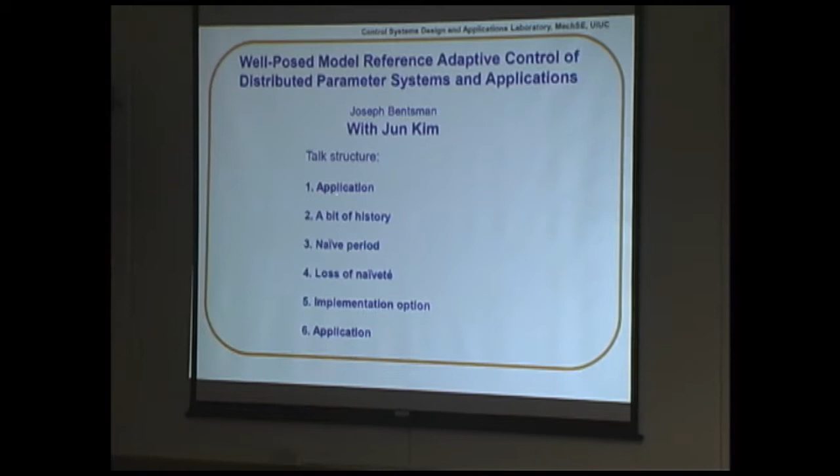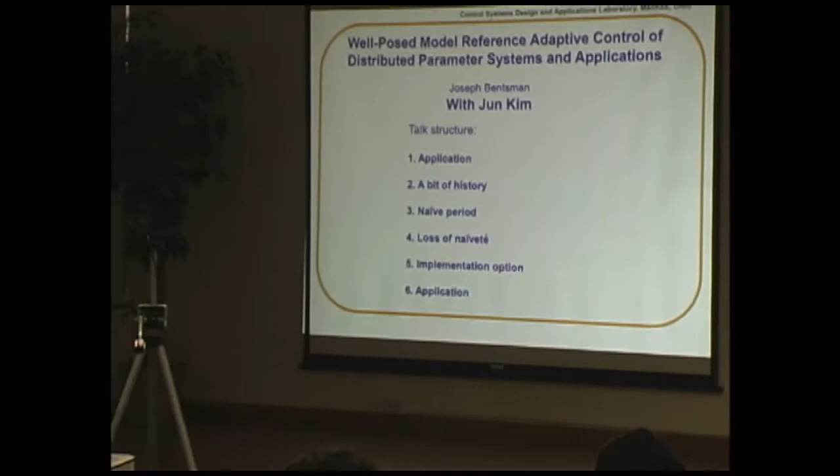This work has a long history, and I will go through the several stages of formation of this area. We had a talk from Professor Krstic a couple of days ago, who is also a carrier of the same tradition. He's a student of Professor Kokotovic, and he started looking at this area after Yuri and I had already developed quite a bit.

So, the applications that we're looking into are numerous. Just two of them that I'm going to present here are the steel casting process and the future transport aircraft that is being developed by NASA right now.

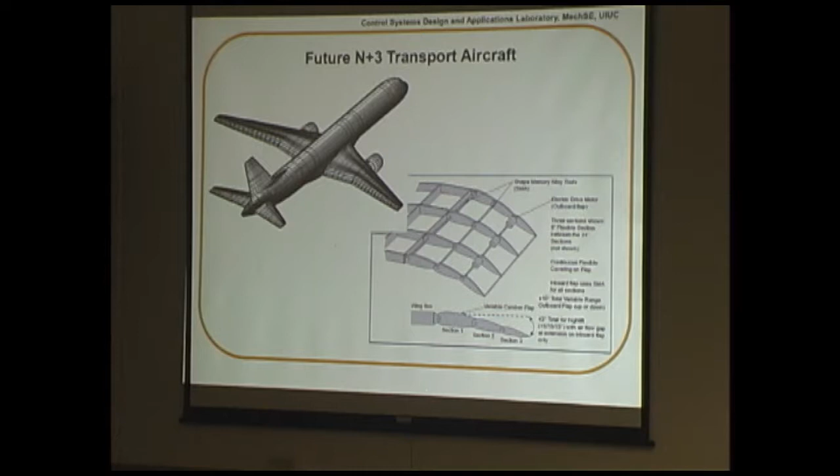In the steel casting process, continuous casting now covers about 95% of the steel produced in the world. When I started working in this area, fresh from a postdoc at the University of Michigan, I immediately began working with Gary Steel.

Gary, Indiana, next door to Champaign-Urbana, about a 2 hour drive, posed the problem of how to control oscillations in the mold, how to control the flow out of these nozzles, and how to control the stirring of the steel through electromagnetic stirrers.

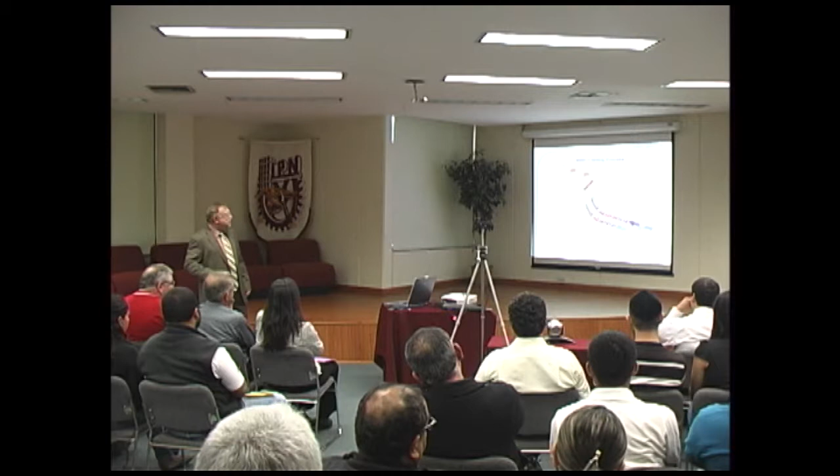But the biggest problem here is how to control solidification. There are two problems with controlling solidification. One is that by the time the steel has to exit the containment zone, where these two rolls are, that marks the end of the containment zone. Otherwise, the steel is contained in the zone.

In blue is completely solidified steel inside the red part, which is called the strand. It's a rectangular section, and this whole thing is called the strand. So this part is fully solidified, and this part is not fully solidified. So what happens very often is that the red area means there's some liquid steel inside there.

Liquid steel all the way from here pushes on this, creating ferrostatic pressure. As a result, this is going to bulge out like a whale and spout — this is called a breakout. That costs about $1 million to fix. It's very dangerous, and it can actually result in human loss of life. This is a phenomenon that has to be contained.

The other problem is that in the bending and unbending areas, a lot of cracks appear. Those cracks are inside, on the interface between the solid and liquid inside the strand — internal cracks. There are also cracks outside, where bending and unbending creates surface cracks.

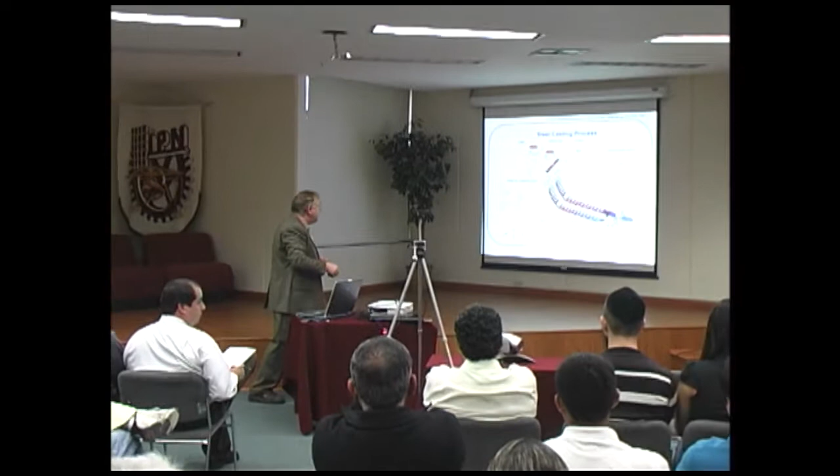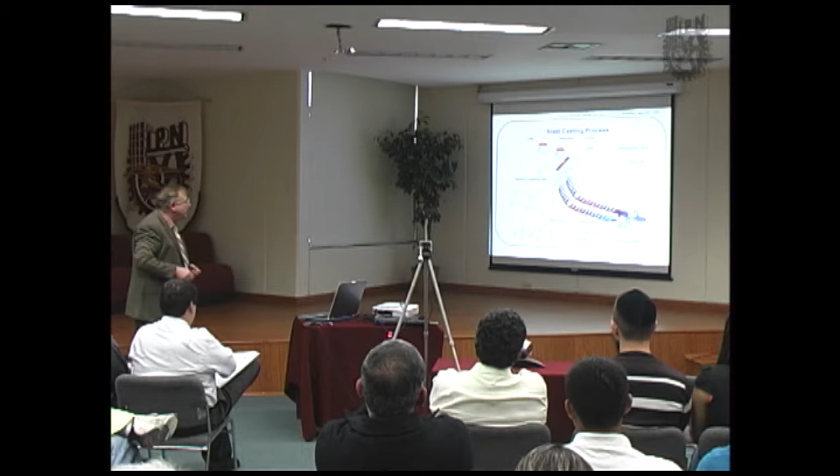So here is the shell: from the inside there's a heat source from the molten steel, and from the outside a heat sink from the sprayed water — the whole thing acts like a rod. If we think of cutting a cross-section here, the whole thing becomes two-dimensional, with liquid inside and solid outside.

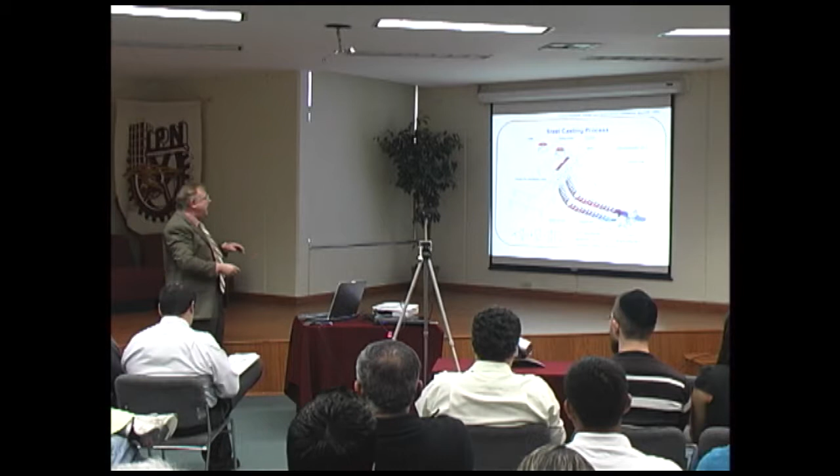When we cut that one along the center line, we get a one-dimensional rod, basically, which flexes. From the inside, this rod is heated up by the molten steel. From the outside, this rod is being cooled by the water.

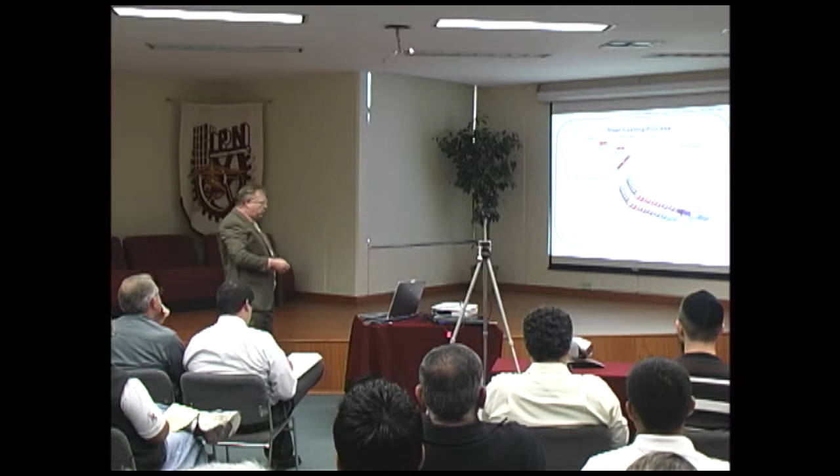So what we have just done is a model reduction from the three-dimensional through this cut to two-dimensional, and that was a boundary control problem because of the sprays. From two-dimensional boundary control, we reduced it to one-dimensional distributed control, where the internal heat is distributed along the length of the rod, and the outer source sink is taking out the heat also in a distributed way by spraying the surface. So what I'm writing here is not boundary control as for the true process, but actually a distributed control, which is just an approximation of this 2D boundary control, actually three-dimensional boundary control, like a one-dimensional distributed control.

Therefore, the equation that I'm going to be considering is the heat equation with distributed control. So this gives rise to a distributed control problem through this view of that cooling problem.

Another point that will come up later in the talk is that the temperature inside the strand is more or less constant. This is the temperature of the steel, of the molten steel inside the strand. Therefore, the heat flux from the internal fluid can be viewed as a constant disturbance. So there will be a rod with constant disturbance.

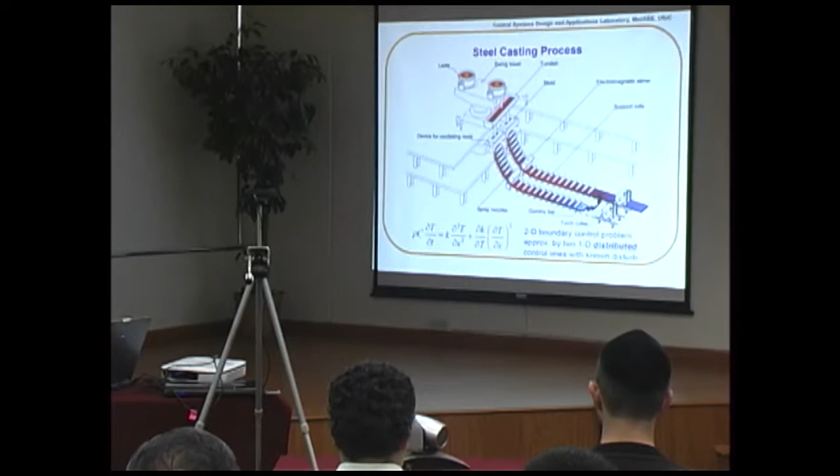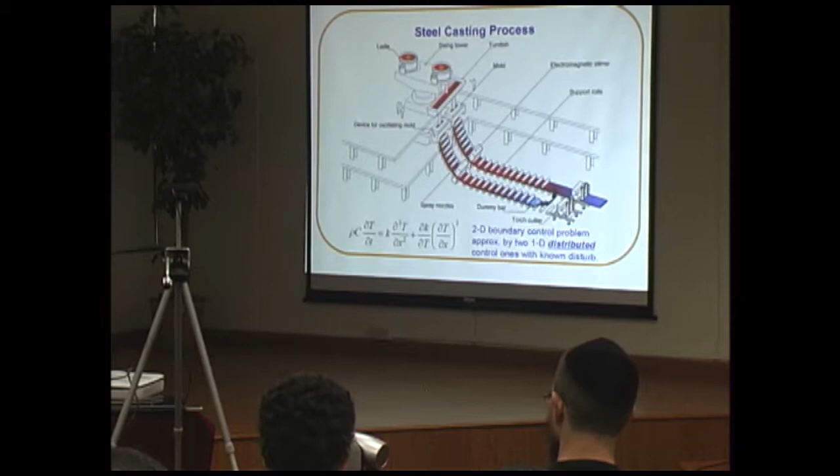These are the heat processes. They give rise to parabolic equations, where you have heat dissipation and parabolic elliptic operators on the right-hand side, which gives parabolic phenomenology in terms of eigenvalues going all the way to the left half plane to infinity, which is very important.

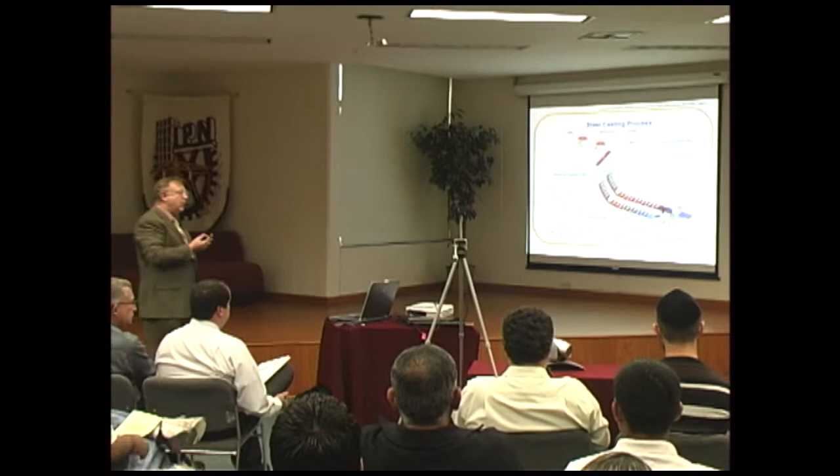So now you think of it that we are associating this process with an expansion that also at the undergraduate level everybody knows. That's where Fourier series originated. When Fourier tried to solve the heat equation, he did substitution in terms of separation of variables, and he got an infinite number of eigenvalues. Those eigenvalues were going all the way into the left half plane, meaning that the motions associated with those were decaying extremely quickly as you go to the left half plane.

We will see that quickness, that speed of decay in distributed parameters, is actually producing an extremely dangerous phenomenon when we wrap the loop around it.

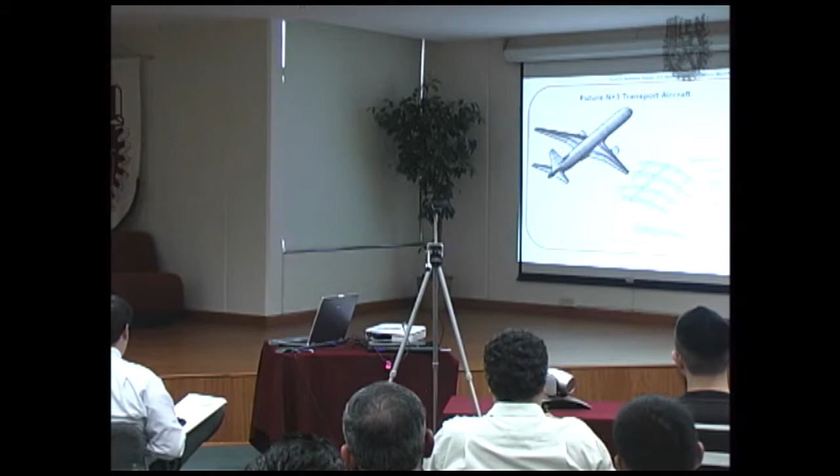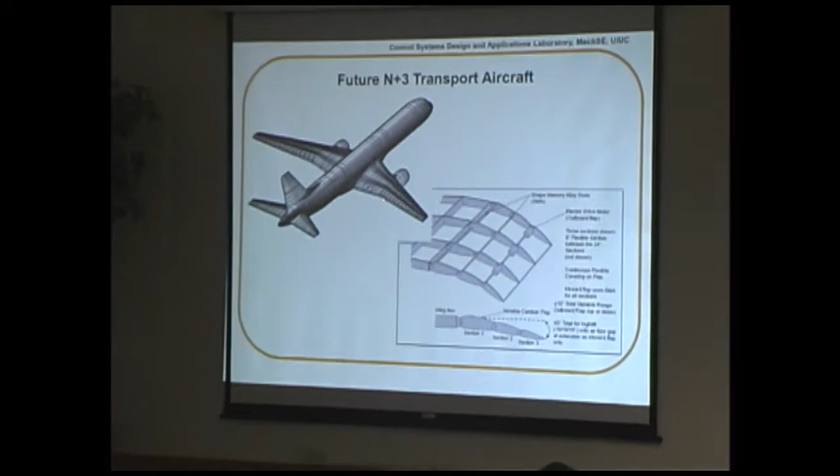The next application is related to the wave equation, or hyperbolic equation. Here is basically like a rod, but we don't heat this rod anymore. There is no heat exchange phenomenon anymore. There is flexing. So it's flexing, and that flexing is related now to wave equation, to wave motion. So now it's a flexible structure.

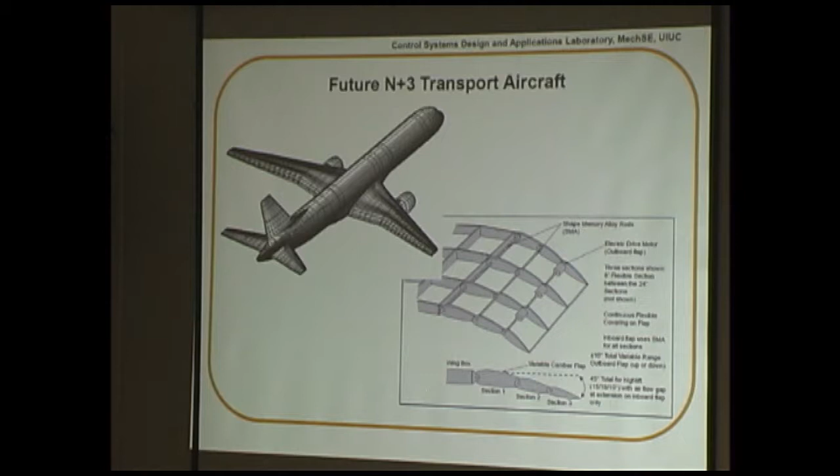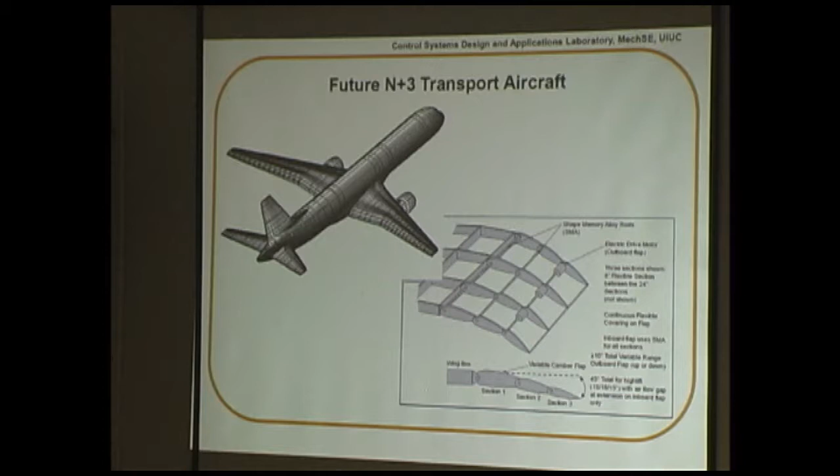So what NASA is developing is distributed actuation right here. So this is a rod. We can do it as a rod. And NASA is putting those flaps right here. This is shape memory alloy. These are electric drive motors. So the whole thing is flexing. The whole wing is flexing, and it can flex differently in different places like this. So this is where the flexing is, on this rear end of the wing.

And this has been built already. NASA is currently doing algorithms for this. I am in touch with the people who are doing this at NASA, and we probably will be trying to do a joint project on that. But as far as the basic fundamental understanding of how to do it, they have been looking at this work that I'm going to present just from the point of view of understanding what can be done, which data structures can be used, what is the robustness of the setup, whether adaptation can be used.

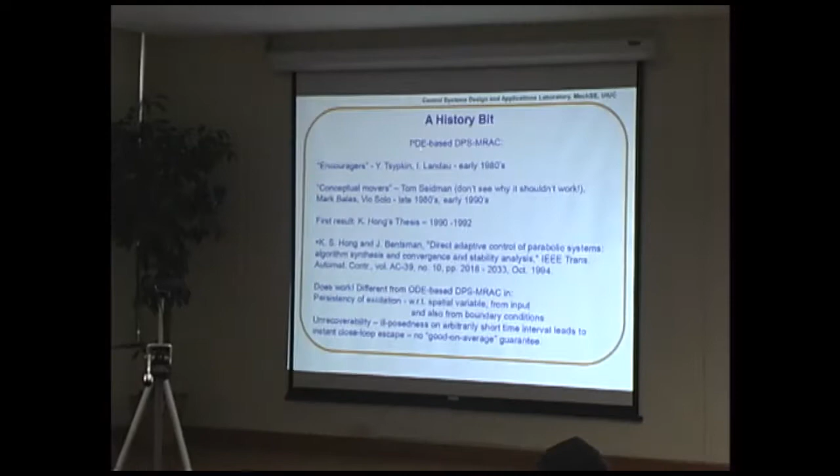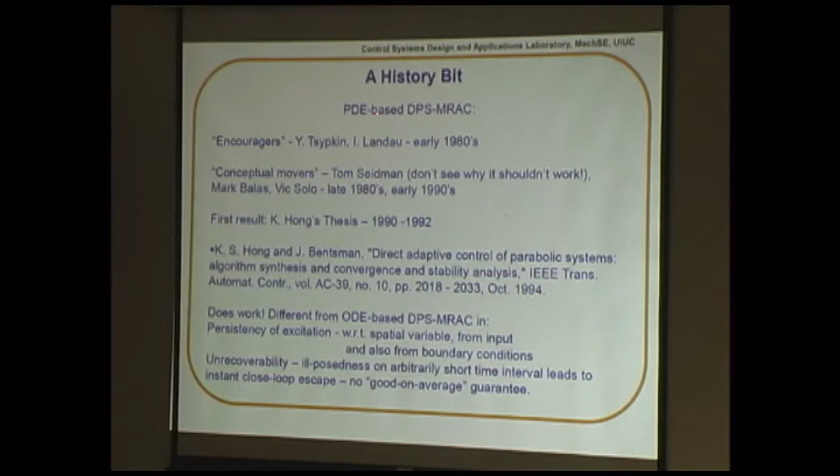So these two applications then drive a lot of research. And that gives rise to partial differential equation-based distributed parameter adaptive control. It could be model reference adaptive control, or it could be other forms of control, like L1 adaptive control that we recently did. So again, from the Moscow Institute of Control Sciences came encouragement from Yakov Zalmanovich Tsypkin, and Tsypkin was the advisor of Peter Kokotovic.

So probably many of you know the name, he was in some department. Yakov Zalmanovich used to come to Urbana quite a bit in the late 80s, and I used to have a lot of talks with him, so he said that yeah, that's an interesting area to look at.

And also Ioan Landau, who came up with a very famous adaptive control idea, a guy who started out using tools right here and applied them to adaptive control, giving rise to a whole direction in adaptive control. So he also said that's a nice area.

There's a brilliant mathematician, Tom Seidman, who I asked what he thought about the area, and he said that he doesn't see why it shouldn't work. So it has to work.

So then Mark Balas did the first paper in adaptive control for distributed parameter systems, and then Vic Solo, a colleague of mine, started working on this area, and you rejoined it in the 90s. The first result was from a PhD thesis that gave rise to a lot of developments.

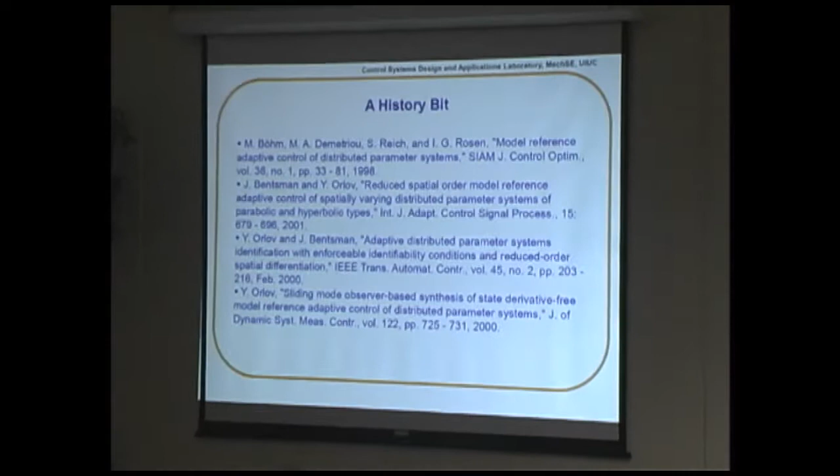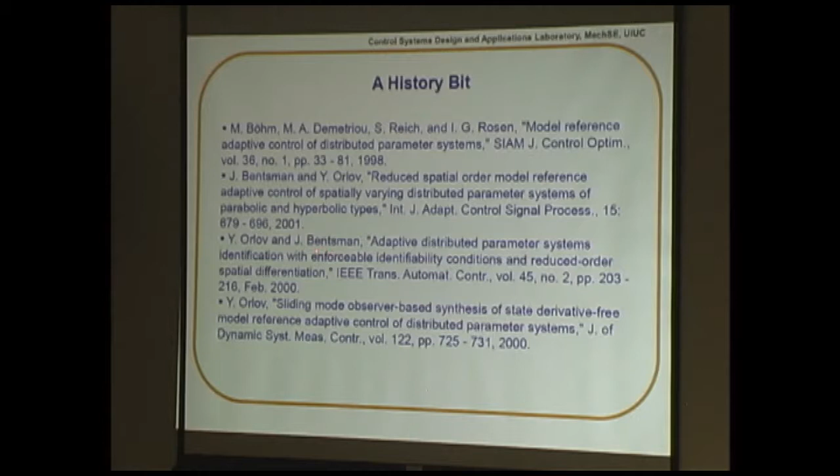I will skip this. Well, actually, probably not good to skip this because you see here a lot of Yuri Orlov's contribution. That's when Yuri was already here. So this whole string of papers, reduced spatial order adaptive control, and here is our big paper, Transactions on Automatic Control for distributed parameter systems.

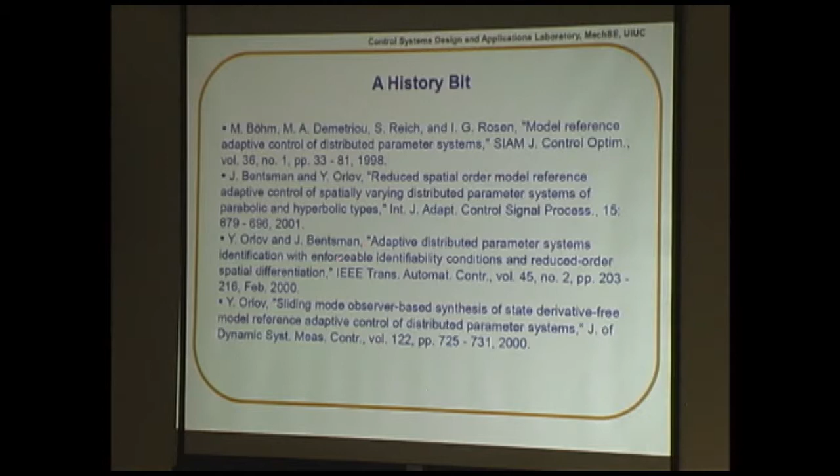Identification with enforceable identifiability conditions, and those are the conditions that differ from the finite-dimensional ordinary differential equation case, because those conditions are spatially induced, not just temporally - not just time-able, but spatial richness here.

And then you read it a lot with sliding mode observer-based synthesis. We have here Leonid Fridman, who also does a lot of work with delay systems, which is a form of distributed system as well.

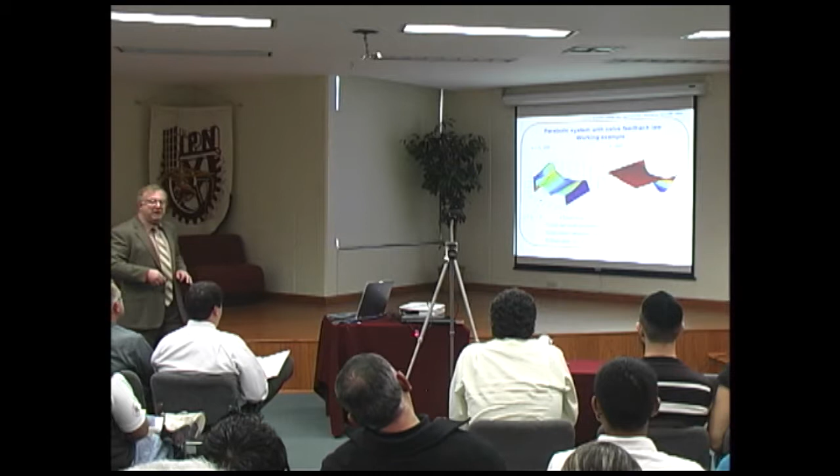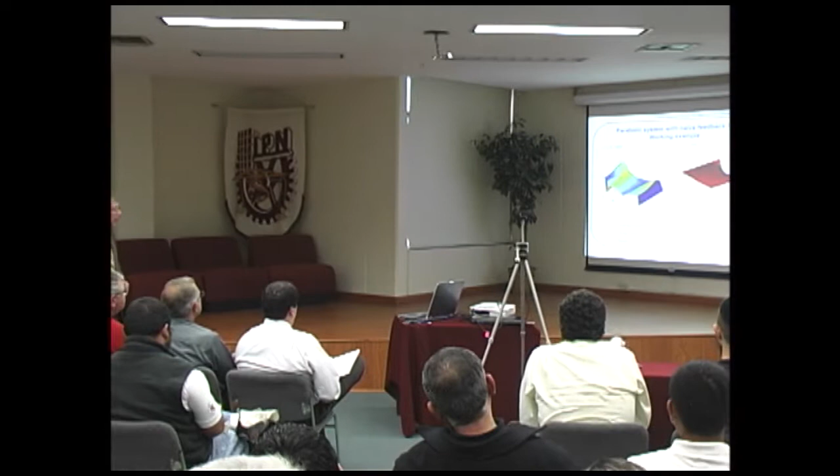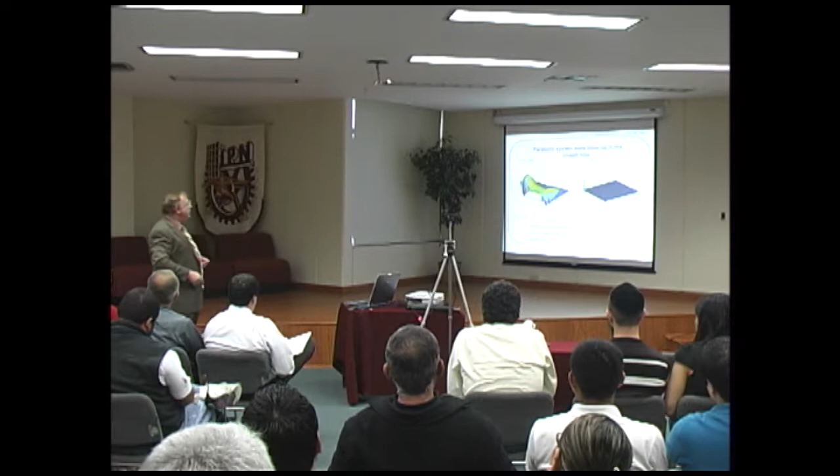But then Vic Sola said, oh guys, you have a big problem right here. This thing can turn out to be negative, and then all your eigenvalues of this heat equation, instead of nicely staying on the left-hand side, they will slew to the right-hand side. And those very nice ones that gave you instant decay will come back to haunt you at plus infinity, and then they will give you instant escape. And there is this instant escape, right here.

So if we change the reference sequence from this nice mild one, like this reference input 5, no big deal, it's just constant, meaning we don't really do anything, we just execute a set point like a constant. Now we start moving a little bit, actually moving a lot. And if we start moving a lot, we immediately blow up. Because that coefficient right here becomes negative at some point, and the system collapses.

And it's very unlike the ordinary differential equation world, which gives you some leeway - okay, you can still recover. This is unrecoverable, because you slew the eigenvalues instantaneously to the right-hand side, and those that were far away at infinity on the left-hand side are now far at infinity on the right-hand side. They blow up instantaneously and the whole software crashes, and you can't recover.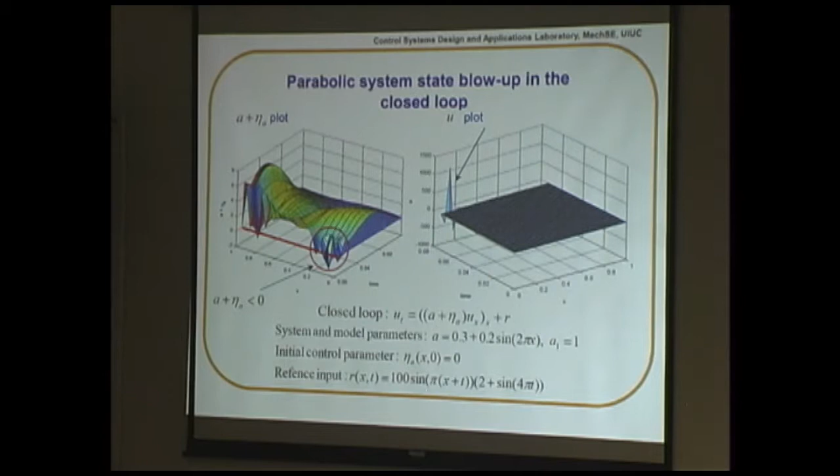That's so bad that everybody at the time said, ooh, this distributed parameter adaptive control is non-robust. It's just junk, basically - you guys painted yourself into the corner. What is the problem? Well, you kind of reduce your setup to this childish case when you get the square. You get x dot equal to x squared, and that's your adaptive control. So what do you want? It just doesn't work.

And that's when we kind of got stuck for about 10 years, until I got the brilliant student, Khan. And Khan was, for 4 years, staring at that, coming up with absolutely nothing. And at the 5th year, he came up with that. Where did he get this from? No idea. Just sheer brilliance.

You know, when you stare at something for 4 years, and your advisor breathes down your neck and says, oh, it's time to graduate. And then the office of the registrar says you have to extend your visa, and you're running out of time, we'll have to ship you back to Korea, you know? So the guy just sits down and suggests this. Come on, what's that?

He suggests a baby step. He says, okay, let's look at this F.

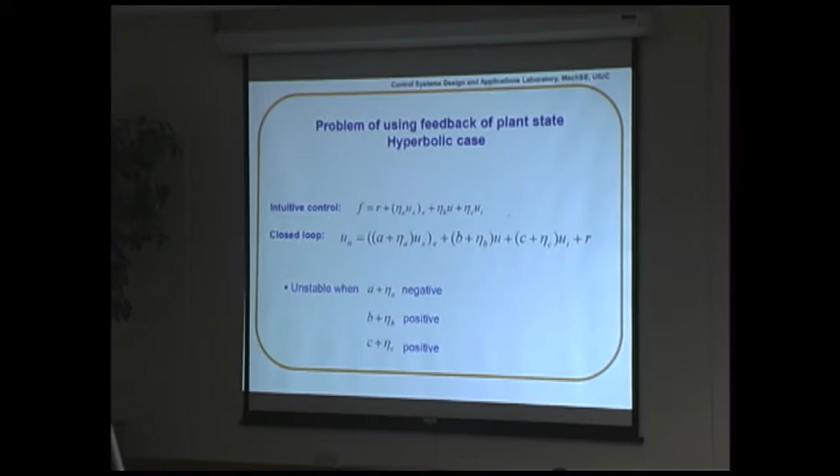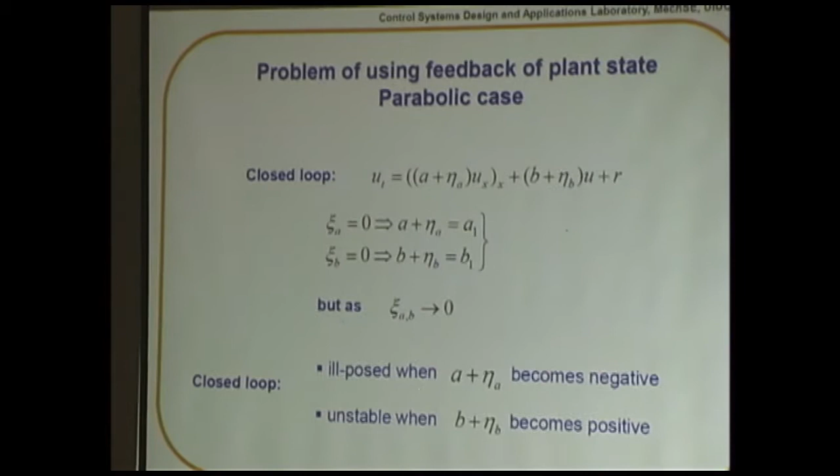This F before consisted of, let's say for the parabolic case, for the simplest case, only 2 terms. What are these 2 terms? One is involving the state of the process, and the other is involving the derivative, the second derivative of the state of the process.

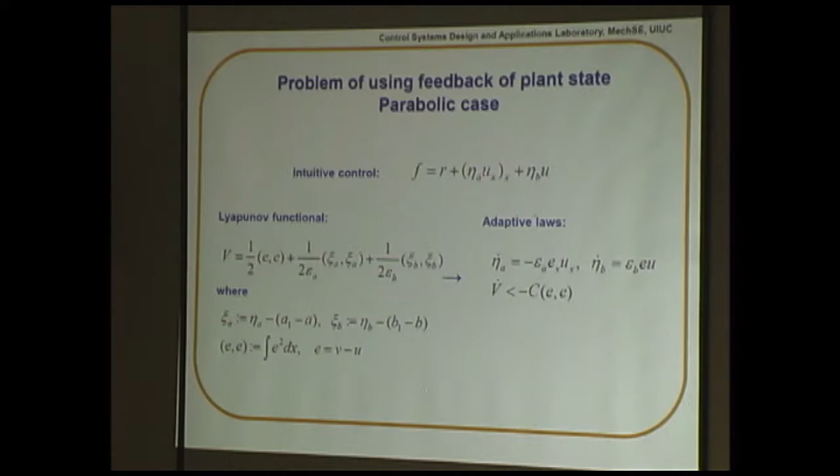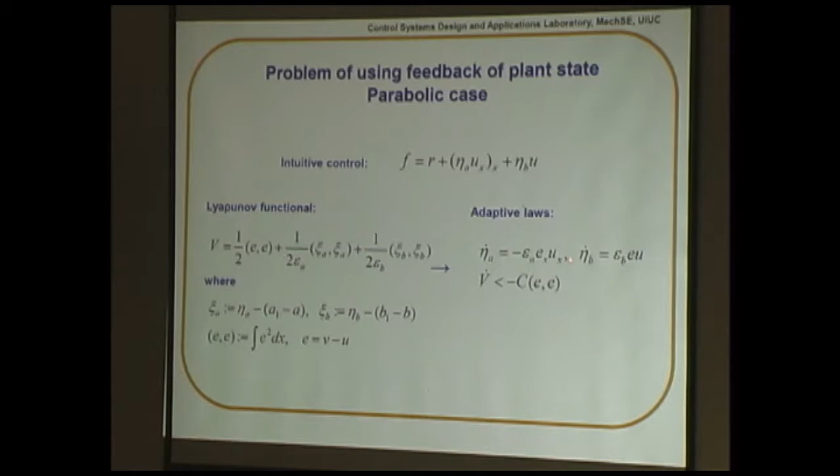Then when we form the error, you have this error multiplying that first derivative right here, and this multiplied first derivative of just the state. So he was thinking, how can we decouple? How can we liquidate this square right here? One square, u sub x from here, and the other u sub x from here, there is a square. How can we get rid of this square? Simple. How can we? What does it mean? Exactly.

How to get rid of this square right here. And this brings along the setting that if we get rid of this square and have just a first order thing, even with spatial derivatives, well that's great, then this becomes linear, and maybe we can also eliminate this product, because there is also a square, but not in terms of u sub x squared, but in terms of u squared. Because in that e, there is u as a difference. So here is a square, and here is a square. This is a square with respect to u, because this one is v minus u, so there is v times u minus u squared. And this is also a square right here. So two squares. How to get rid of it?

And what Khan did not realize, and realized later, my other student Vivek, when we already chopped it up for multi-dimensional, for multi-agent systems that I'll show you later, was that once we get rid of this square here and here, then everything else is linear, and we have linearized that adaptation law.

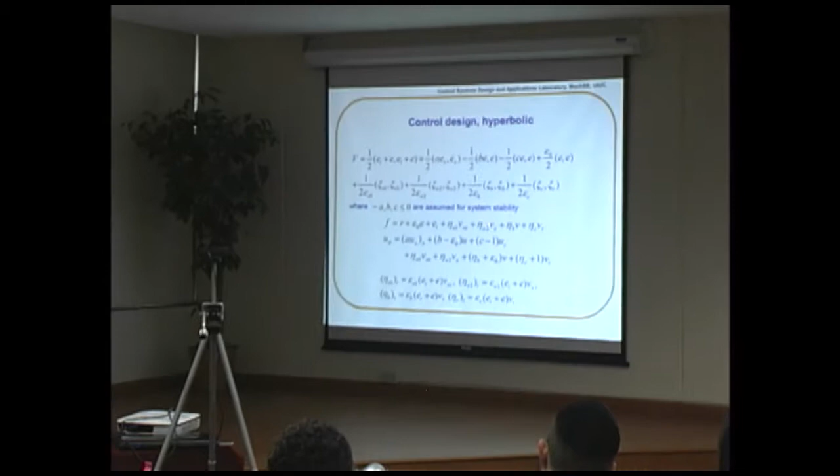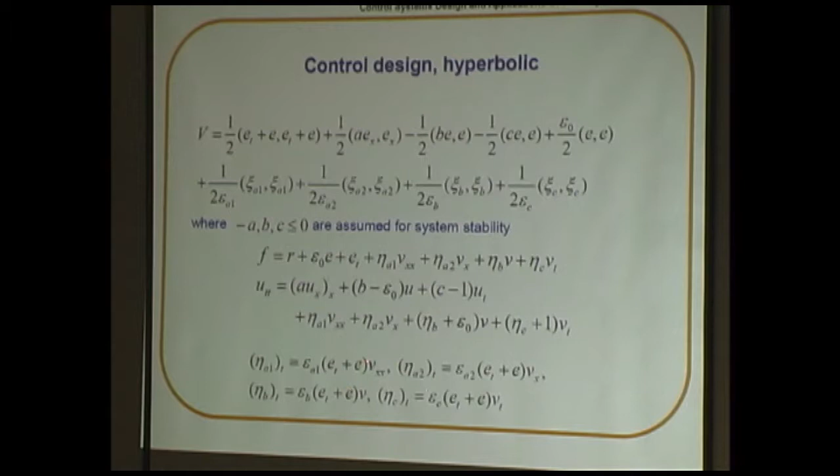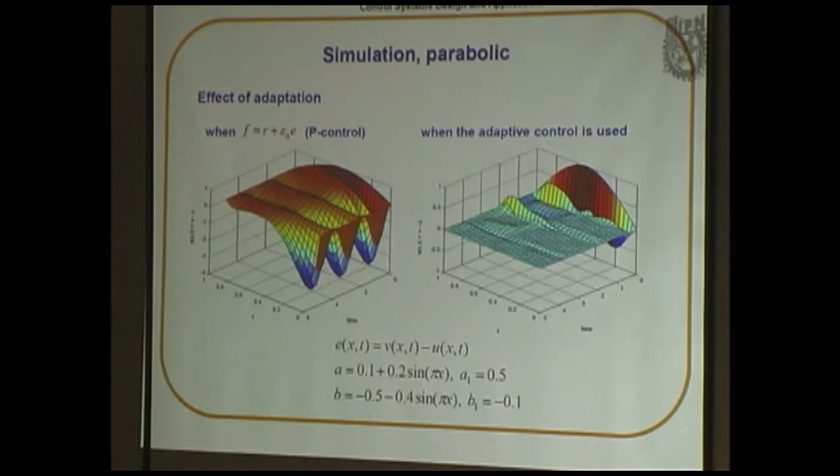So as far as adaptation laws, they are only containing linear parts with respect to the closed loop. And that's the equation. Now everything is beautiful, just everything works beautifully. And not only that, we can put on one hand Dirichlet boundary condition, on the other side we can put Neumann boundary condition—before the system didn't work. So that kind of robustness suddenly allowed not only to stabilize what we couldn't stabilize before, but something much bigger, which we don't yet know how to completely prove.

And this is, by the way, the effect of adaptation. This is like P control without adaptation. And if we don't know the plant—for example, our coefficients change, but we don't know what is the change—if we just apply proportional control, well, there is no control, it cannot handle that. Now, if we apply adaptive control, that's what the error is. Instead of this error, which never decays, that's what the error is now.

So this is mixed boundary condition, by the way. This is Neumann on one hand, Dirichlet on the other hand, error is 0.